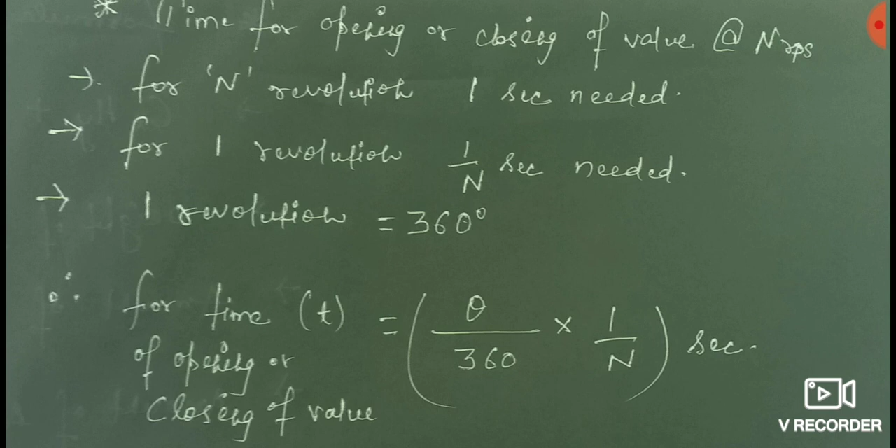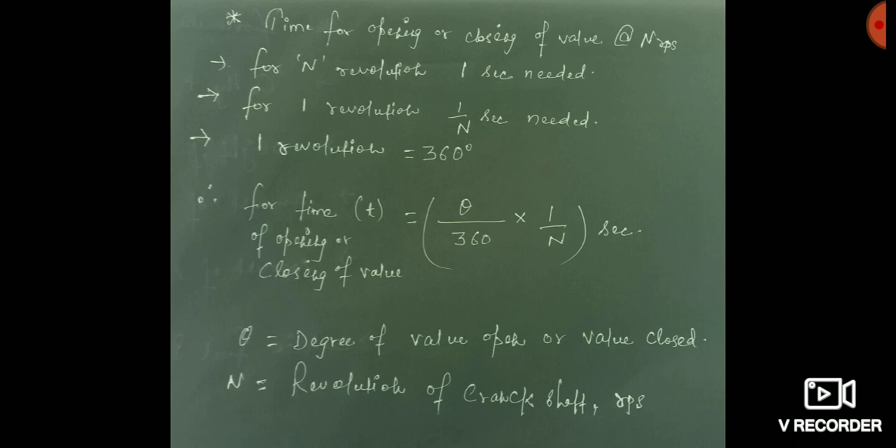And friends, one more thing - if it is doing 1 revolution, then it covers a circle completely, and all of you know a circle is 360 degrees. So friends, in questions, whatever is asked - how much time both valves are open, how much time both valves are closed, how much time the suction valve is open, how much time the exhaust valve is open or closed - these kinds of questions are asked. So you don't have to remember the questions, you have to remember the concepts. Whatever is asked, you can easily calculate it if you understand this.

You see that time is theta by 360 into 1 by n. Friends, here theta is the degree of valve opening. Whatever the valve, whatever theta means - suppose it is asking about the suction valve, how much time the suction valve is open - then you can easily calculate by the valve timing diagram. You can easily draw the valve timing diagram and calculate the theta value, meaning the amount of degrees of suction valve opening - how much time the suction valve is open - you can calculate if you know the angle.

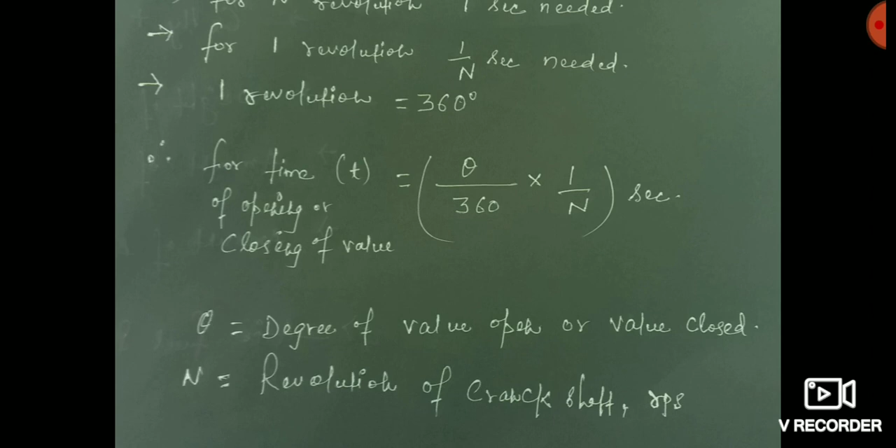Suppose we have calculated that the suction valve is opening from 15 degrees from TDC and it will go up to 30 degrees from BDC. So the total degree for opening of the suction valve is 15 plus 30 plus 180 degrees - meaning one straight line is 180 degrees, and 15 plus 30 means 45 plus 180, that is 225 degrees is the total timing of opening of the suction valve.

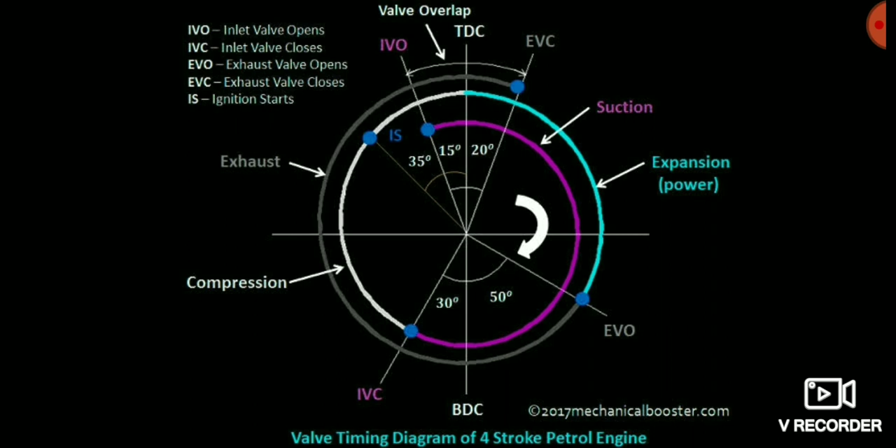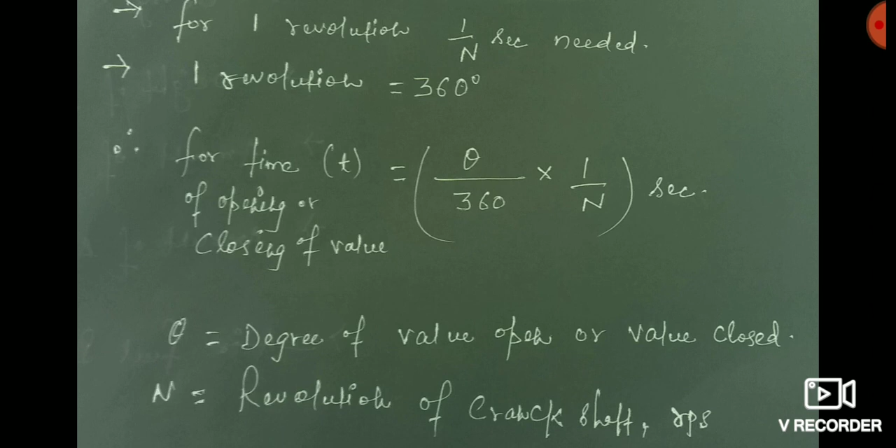And similarly friends, for the exhaust valve also you can calculate, for both suction and exhaust open. You should take the common of both suction and exhaust valve open, and you should take the common of both suction and exhaust valves closed. You can easily calculate whatever degree they are opening. And friends, when you get the degree, then you simply put it in this formula, that is theta by 360 into 1 by n.

You have to simply remember this formula. The first thing you have to do is calculate the degree, the amount of degree that is asked in the question. If it is asking anything, you don't have to worry about it - you first calculate the degree and then put the value in this formula, and you will get your answer in terms of seconds.

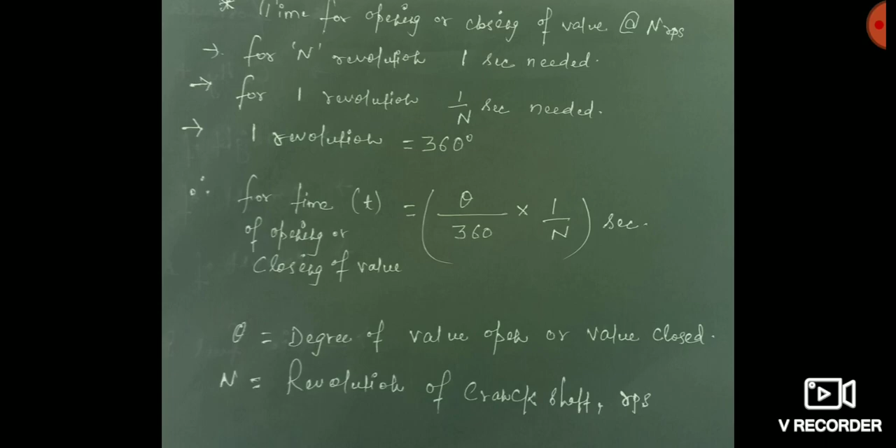And friends, one more thing - regarding this topic questions have also been asked. So I have made it as a theory for you people so that you can easily understand the theory and be able to solve problems. Only questions have been asked on this topic, so I have considered it as a theoretical portion because it is very useful, and in upcoming years also questions have been asked on this.

Friends, for combustion inside the cylinder of hydrocarbons - I think all of you know that hydrocarbons are a combination of hydrogen and carbon. So the formula CxHy plus (x plus y by 4) O2 is equal to x CO2 plus y by 2 H2O.

Friends, you have to remember this equation. You have to remember this equation because you don't have to waste your time in the examination. If you remember the equation, you can solve the questions in very short time and very easily. You don't have to worry about mistakes and errors. It is a very good concept and it will help you in solving so many questions asked in previous years. So you can see this concept carefully.

Friends, in questions they mostly ask about the air fuel ratio. For that you have to first calculate the weight of fuel - that is, CxHy is our weight of fuel. Friends, here x and y are both variables.

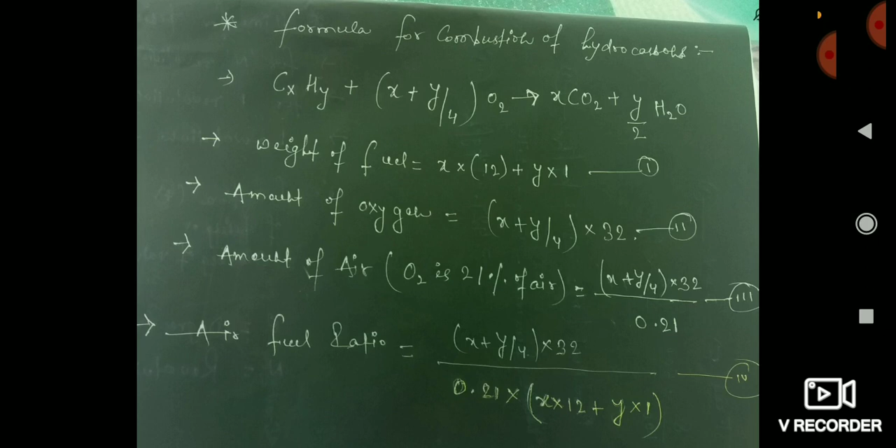After that, friends, it is very easy to calculate the air fuel ratio. You should simply use the weight of air divided by weight of fuel, and you will get the answer.

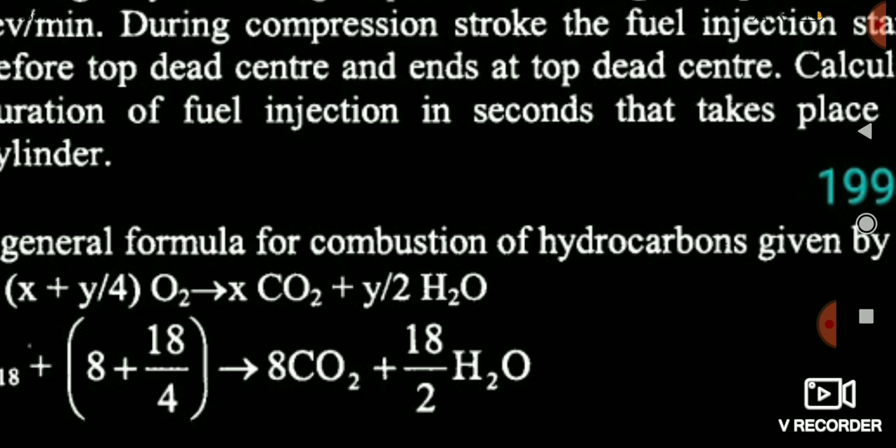Friends, here it is written by mistake. It is not C3H15, it is C8H18. It has been written by mistake, so I apologize for that. You see in this equation, it is C8H18 here. So you should simply use the relation X plus Y by 4 equal to X CO2 plus Y by 2 H2O.

You simply use that relation and put all the values. You see here that I have calculated the fuel weight, that is 12 into 8 plus 1 into 18, which is equal to 114 grams of fuel, and the amount of oxygen, friends, is 8 plus 18 by 4 into 32, that is 400 grams.

After that, friends, it is asked in the question from 1994. At that time we were considering 23%, meaning this is around 26 years ago. So it has been solved using 23% oxygen, since at that time the oxygen level was more, but after 26 years the oxygen level has reduced. So now the present status of oxygen in the atmosphere is 21%. You should consider 21%, but here it is considered 23%, so you don't have to worry about that.

My motto is mostly to tell you the logic behind the question. The values don't matter, only the logic matters. You have to understand how to solve such questions when asked. And friends, at last it is asking about the air fuel ratio. So I have taken the air fuel ratio, and you see that my air fuel ratio comes out to be 15.25.

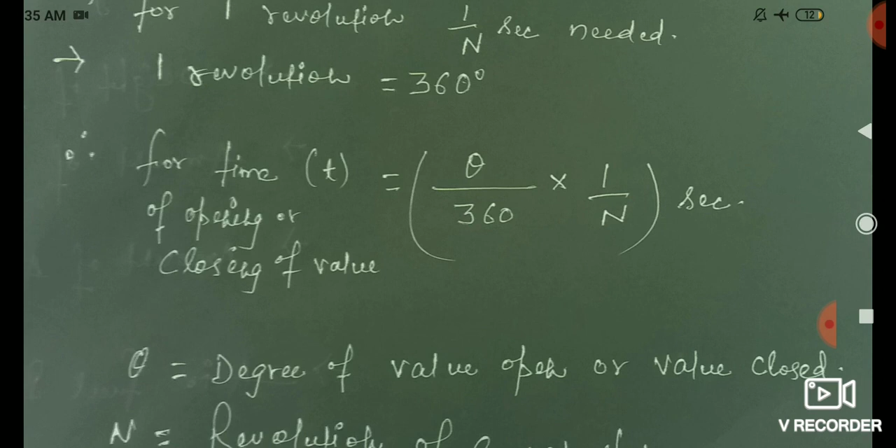You don't have to worry about what to do. You simply put theta value, which is given as 20, and n value, which is given as 2000 RPM, but you should divide it by 60 to get your value in seconds, RPS, and you can get your answer in terms of seconds. Friends, one more approach is given here to solve the question, but I will suggest you should solve it using the formula I have given, using that approach only. That is sufficient to solve this question.

And here you see that the solution for 2000 revolutions is equal to 2000 into 360, meaning the same thing has also been done here.

Total degree it has calculated, that is 2000 into 360. Whatever the denominator value we are getting now, theta by 360 into 1 by n, means in the denominator we can get 360 into n. That value only it has calculated, that is 720,000 degree, and it has simply put the 60 by, meaning it has also done unit conversion to convert it into seconds.

720,000 into 20 means here also the same thing is happening, that is 360 into n we have put in the denominator and theta value we have put in the numerator, and then after we multiply by 60 we can get our answer in seconds. So that's all, I think it is very easy.

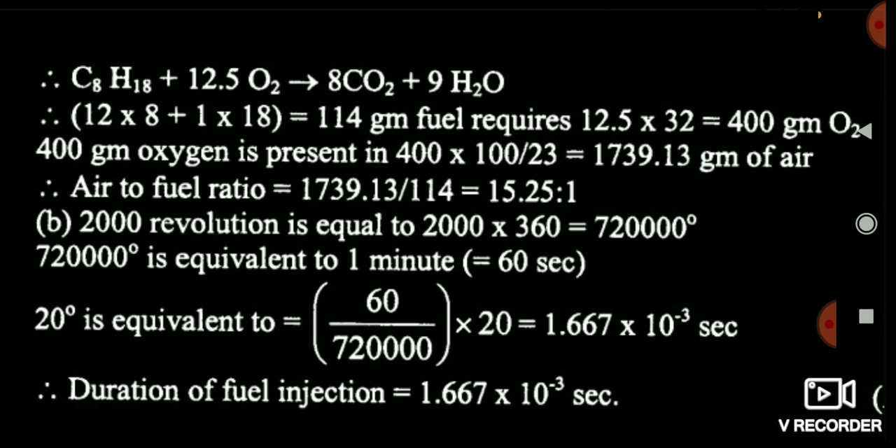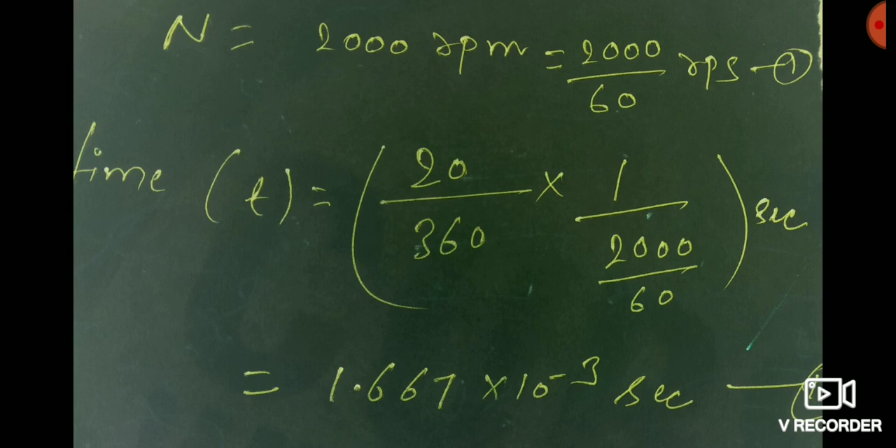You see the solution of the previous question. It is very easily solved with this formula. You see that it is very easy and we can get the same answer. So I will suggest you all to go by this approach.

Now friends, see one more question. Here it is looking a little bit lengthy and complex, but genuinely it is very easy. If you understand this question, then you are easily able to solve this. You see that the inlet valve opens 10 degrees before TDC and closes 40 degrees after BDC, and the exhaust valve opens 35 degrees before BDC and closes 5 degrees after TDC.

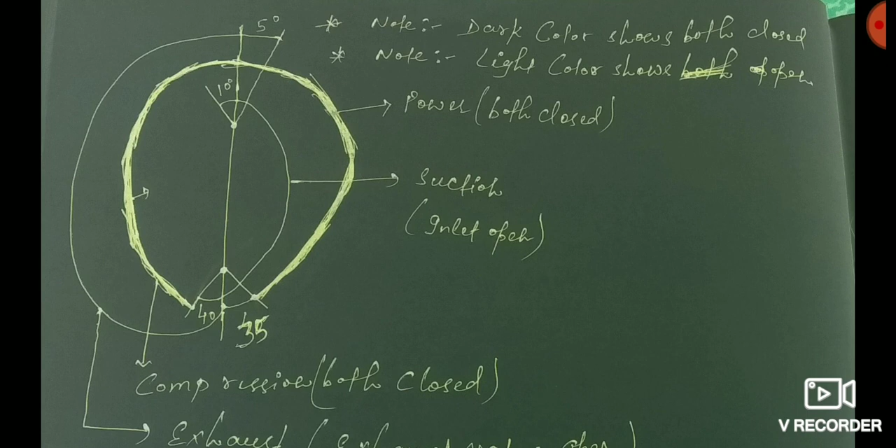You see that first, before 10 degrees the inlet valve opens, meaning with the small line in light color I have marked whatever times the inlet valve is open and whatever times the exhaust valve is open, and with dark color or thick line I have represented the timing when both the inlet and exhaust valves are closed.

You see that the inlet valve is open 10 degrees before TDC and closes 40 degrees after BDC. So the suction is happening during this portion, and after 40 degrees from BDC both the inlet and exhaust valve are closed. So you can see with the dark color during the compression stroke both are closed.

I have clearly written and mentioned here, and during the power stroke also both have closed.

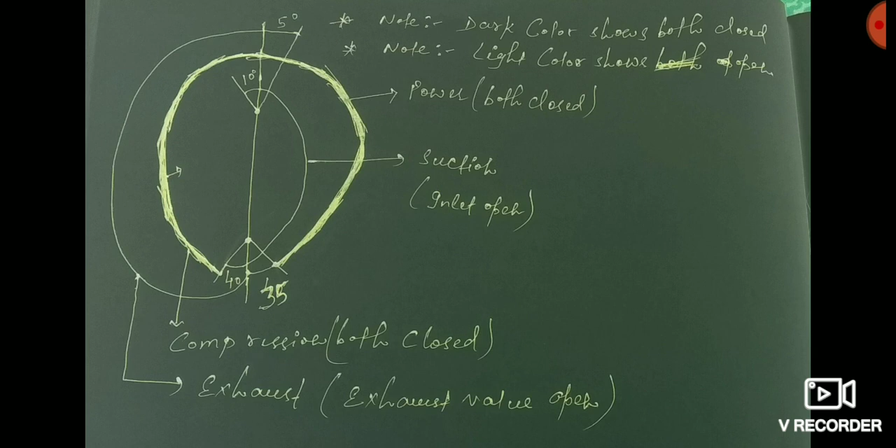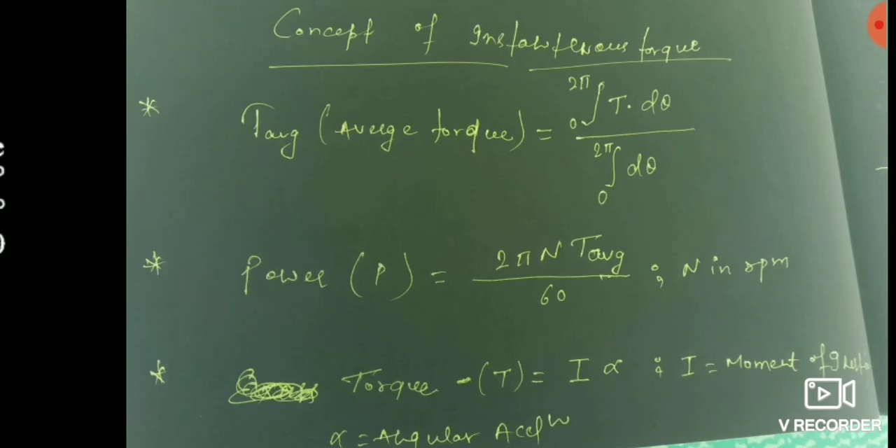But friends, you see in the question that 35 degrees before BDC the exhaust valve opens and 5 degrees after TDC it will close. So you see here the exhaust valve opens 35 degrees before BDC and it goes up to 5 degrees after TDC. So I will only consider the highlighted portion, whatever I have made with the thick line.

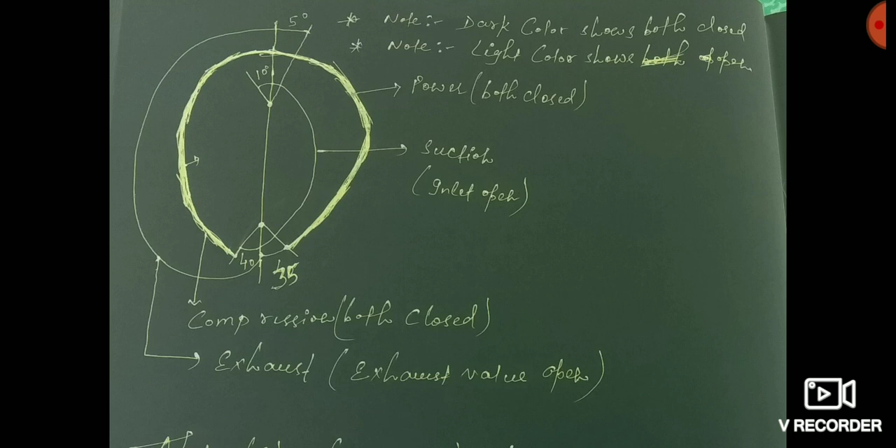During this portion only both the suction, meaning inlet and exhaust valves, are open. So you clearly understand this, and if you have any doubt you can draw it in your copy also. Whenever you see such type of questions, the first thing you should do is draw the diagram of that question, meaning whatever data is given in the question you simply draw its diagram so that you can clearly get the information of what is being asked and what is happening.

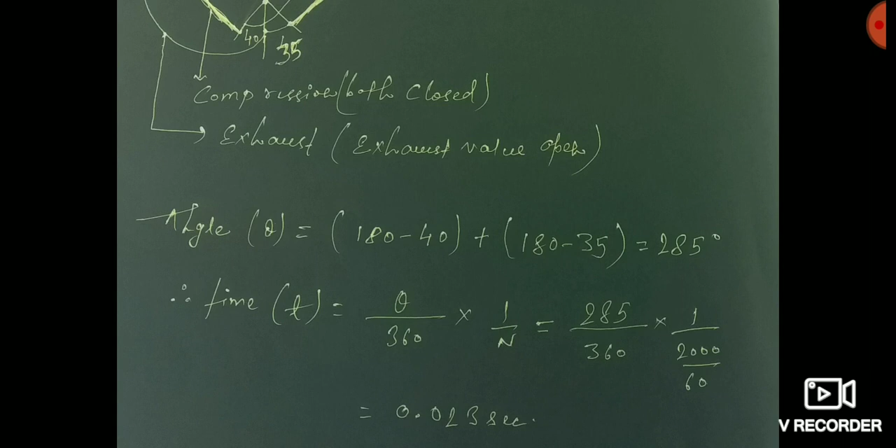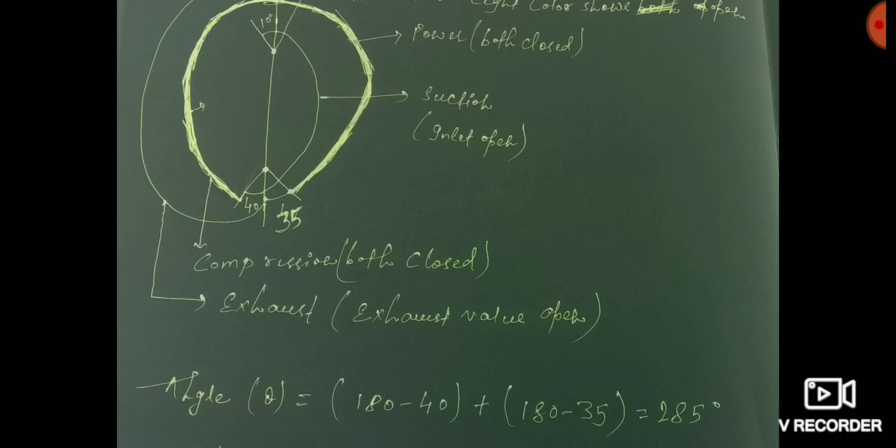Now friends, we have to calculate the angle. For getting the time we have to calculate the angle. So the first thing you should see here is 180 minus 40. Friends, you see that up to 40 degrees from BDC, bottom dead center, the inlet valve is open. So you should subtract 40 from the total, since one straight line is 180 degrees, and you should subtract 40 degrees from that.

And friends, during the power stroke the exhaust valve will open 35 degrees before BDC. So you should subtract total 180 minus 35 also. So you should add both these degrees, and you can get the total degree, that is 285.

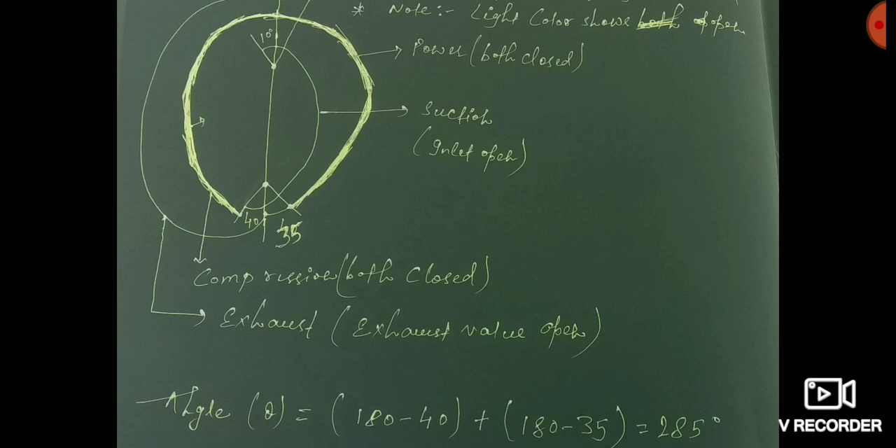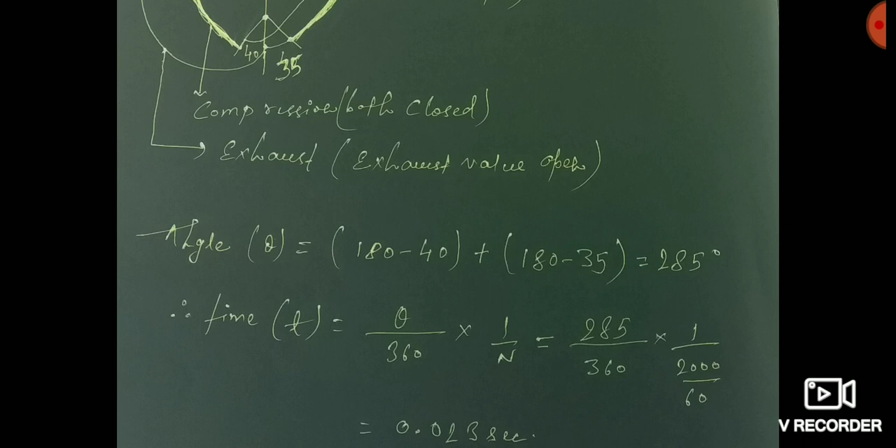And friends, whenever you can get the degree, it is very easy to calculate the required time by using the formula I have given you, that is theta by 360 into 1 by n, and you put all these values and you can get the answer in SI units.

Now friends, I would like to give you one more concept of torque, because many times questions have been asked upon this topic, so I would like you to read it carefully. Many times questions have been given upon the instantaneous torque, meaning torque is given in terms of theta.

So when the question asks to calculate the average torque, friends, you should simply do the integration from 0 to 2 pi: T dot d theta from 0 to 2 pi, and in the denominator, integration of d theta from 0 to 2 pi. Similarly, many times it has been asked that you have to calculate the power.

Many students are confused about which torque to use. All of you know that the power formula is 2 pi nT by 60. So students get confused about which torque to consider at which instant. If it is simply asking for the power, first calculate the average torque, and then put 2 pi n times the average torque, since the torque here should be the average torque.

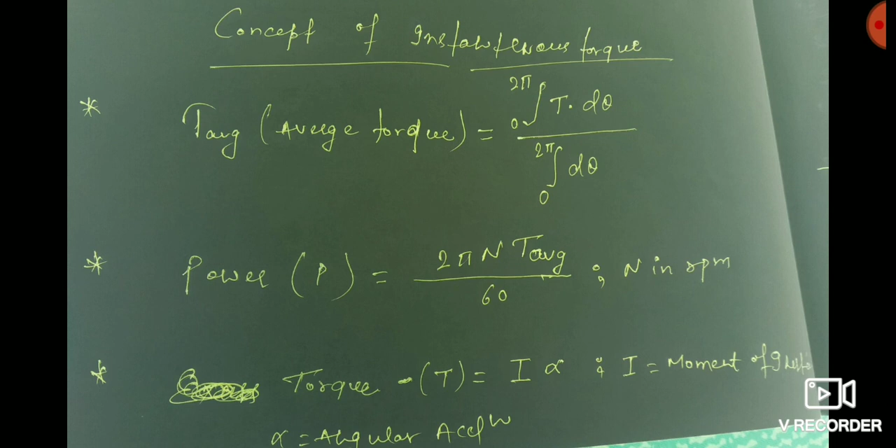And friends, I think all of you know that torque is equal to I into alpha, where I is the moment of inertia and alpha is the angular acceleration.

In question 98, the instantaneous torque is given in terms of alpha, and it first asks for the average torque, meaning we have to calculate that first. For calculating the average torque, use the relationship T dot d alpha divided by d alpha, integrated from 0 to 2 pi. You simply integrate it and you can get the average torque.

You see here I have done the integration and put the limits, and I have got 18,000 Newton meter as the average torque.

After that, the question asks for the horsepower, meaning it is asking about the power. For calculating the power, use the formula 2 pi nT by 60, where the torque T is the average torque. I have calculated the average torque as 18,000, and putting this value in the 2 pi nT by 60 formula, you get the power, that is 377 kilowatt.

After that, the question asks for the excess energy. Friends, the excess energy is at alpha equal to pi by 4. You should simply put the value of pi by 4 in the torque equation: 18,000 plus 8,400 sine 2 alpha minus 4600 cos 2 alpha. You put the alpha value, that is pi by 4.

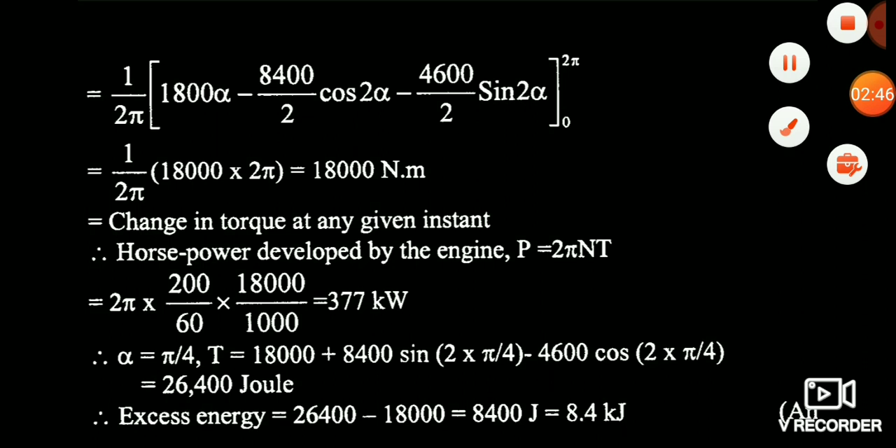Now friends, see another question. It is also a very simple question and based upon the previous concept only.

Here the torque is also given, and the first thing it asks is the power developed by the engine at an RPM of 200.

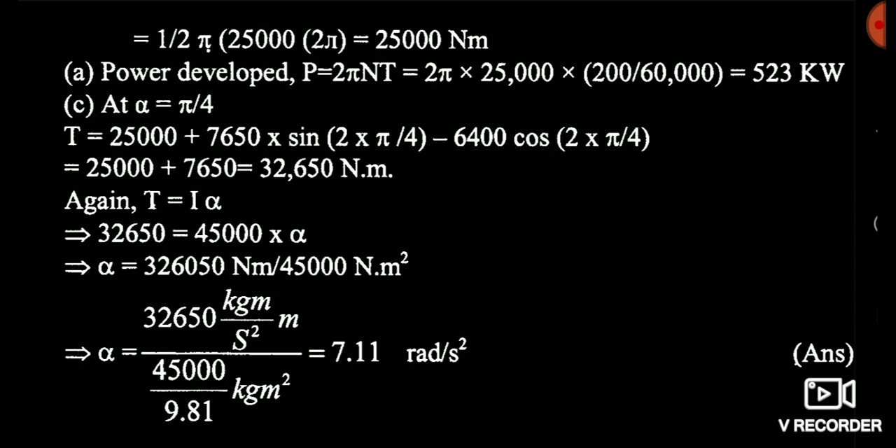So you should calculate the alpha, that is 7.11 radian per second square. And friends, one more thing you should take care about: the moment of inertia is given here as 45,000 Newton meter square. But friends, the SI unit for moment of inertia is kg meter square, not Newton meter square. So you should divide 45,000 by 9.81, because our SI unit for moment of inertia is kg meter square, but here in the question it is given in Newton meter square. So you should divide it by 9.81 and you will get the answer, that is 7.11.

See one more question, I think this is the last question. I have forgotten to solve it in the previous engine lecture, so it is very easy, based upon the previous concept only, I think engine part 1 or part 2 concept. So in this question it is given the stroke bore ratio is 0.96 and the piston speed is given, and 40 kilowatt power is produced. It is also given that the clearance volume per cylinder is 62.5 centimeter cube and the total swept volume is given, that is 4,000 centimeter cube. So friends, it is firstly asking the compression ratio.

I think all of you have studied in my previous videos that compression ratio is simply the ratio of total volume divided by the clearance volume. So friends, you should simply calculate, you see here that it is a 4-cylinder engine. So for a 4-cylinder engine, the total swept volume is 4,000 centimeter cube. So what will be the volume for 1 cylinder? That is 4,000 divided by 4.

So you should take care about this only, because many students simply do it in a hurry. They are simply adding both these values, meaning clearance volume and stroke volume, and dividing by clearance volume, and they are getting the wrong answer. So friends, you should take care about that. Whatever volume we are considering, we should consider for 1 cylinder, meaning for each cylinder you are calculating the compression ratio, you have to take per cylinder volume, whether it is stroke volume or swept volume and clearance volume.

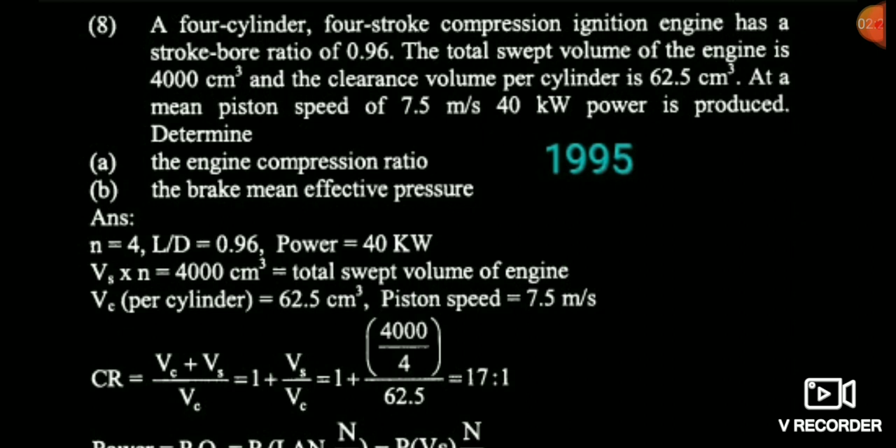We have to consider it should be per cylinder. So you see here that 4,000 centimeter cube is the total swept volume for 4 cylinders. So for 1 cylinder it is 1,000, and clearance volume per cylinder is 62.5. So no problem in this, and you simply put the values, you can get the answer, that is 17:1.

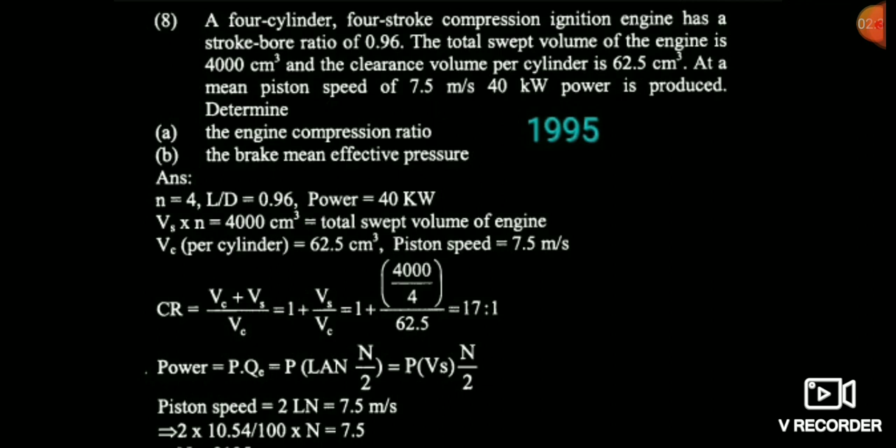And friends, in the second part it is asking about brake mean effective pressure. You see that the piston speed is given, that is 7.5 meter per second. So I have told you in my previous lecture also, piston speed is equal to 2LN. If you want to know how it has come 2ln, then you watch my previous video, there I have clearly explained it. So 2LN is equal to 7.5 meter per second.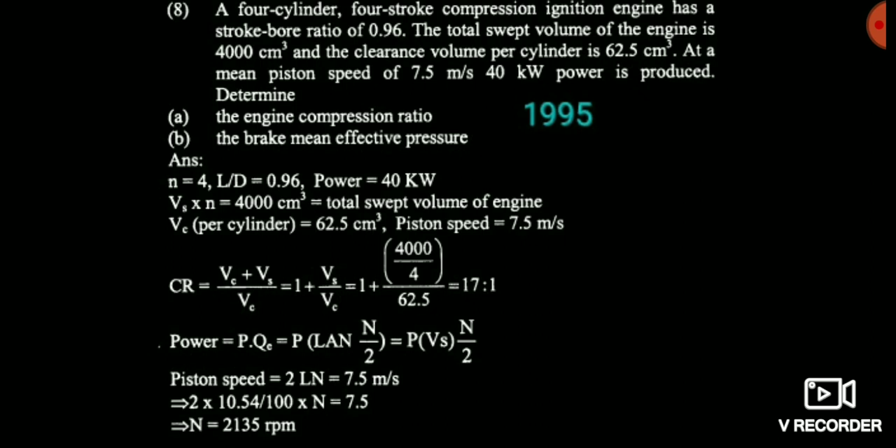So from this, the L value we should calculate, L value is given, and we should calculate the n value from here, meaning the RPM we should calculate from here, that is 2135 RPM. So you should calculate the RPM, that is 2135, and you put it in the PLAN formula. Power is given, that is 40 kilowatt, and PLAN into, it is a case of 4 cylinder 4 stroke, so X by 2 means 4 by 2, 4 cylinder and 4 stroke, so 1 by 2.

So you should take, and friends, one more thing, you see that stroke bore ratio is given 0.96, and also the swept volume per cylinder we have calculated, that is 4000 divided by 4 is equal to 1000 centimeter cube. So from there you can calculate the length and also calculate the diameter if you want to calculate. Meaning everything is given in this question, you simply have to put the values and you will get the brake mean effective pressure. So I have not calculated here the brake mean effective pressure, I have left it for you people. You people will do your calculation and you match the answer, you will definitely get the right answer.

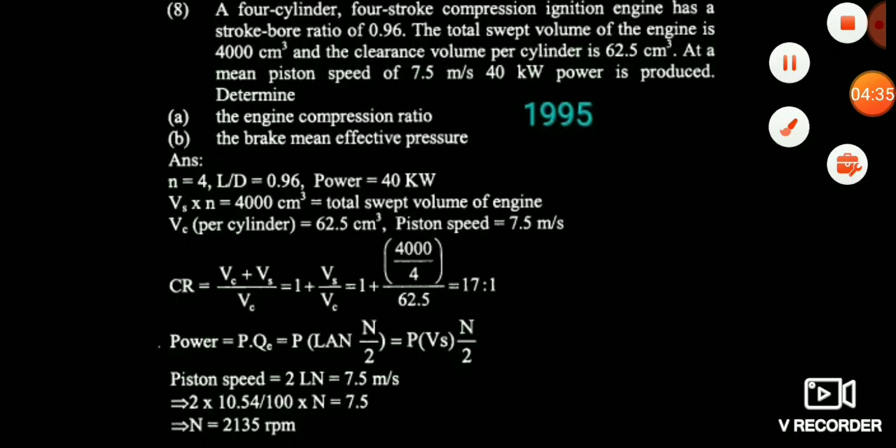And friends, I have tried to cover most of the concepts. I think 80 to 90% of the concepts regarding the engine topic has been covered, and some questions are remaining. I will solve them in my next lectures, meaning upcoming lectures, not now, but I will definitely upload a video upon that. And one more thing I will say, this theory is sufficient for solving the questions of engine and farm power mostly. So you should try whatever questions you see regarding farm power and engine, you should be able to solve them using this concept and this theory. So you can try by yourself also, so that you can excel in the final examination. Thank you, that's all.